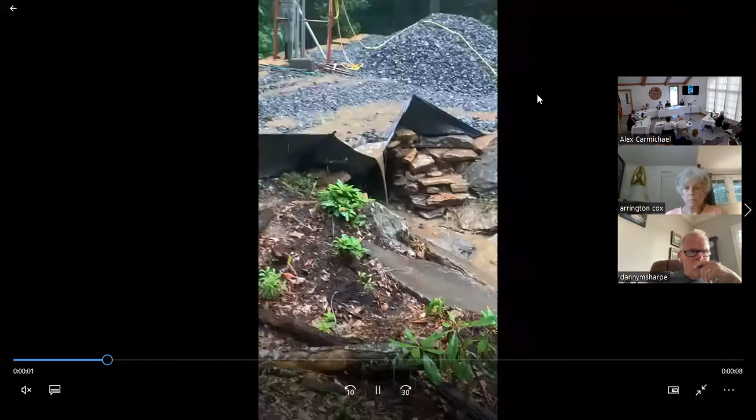I'd like to start off by asking that these videos, which probably total 30 seconds, be shown on the screen, so everybody will know what I'm talking about. Josh, can you open the folder Jim Hamilton exhibits under the 8/4 date. And yes, so that should be, yeah. That's the wrong video, Mr. Chairman. That's the wrong video. That's the right one.

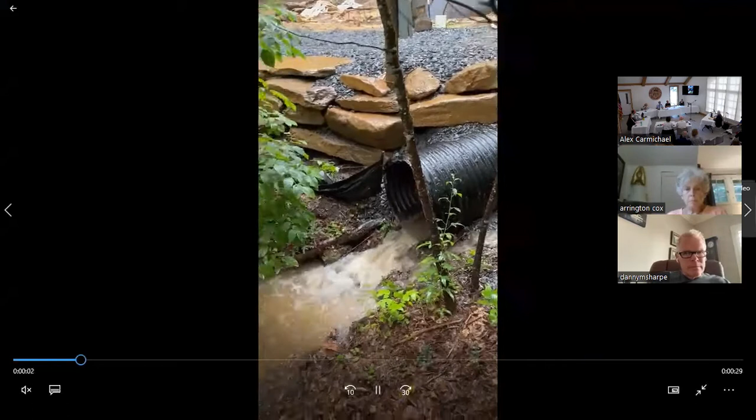This is a video showing water coming out of the culvert under the stream bed in my property and then rushing down the stream bed. And this is a video showing the water coming down after it's left my property onto a right of way and then through the culvert under Graybeard Trail and flowing into Flat Creek.

The first video showed water coming out of the culvert from Mr. Burns' property into the stream bed on my property, and then flowing down that stream bed for maybe 20 or 30 feet. The stream continues on my property for 100 feet, but we showed about 20 feet of the stormwater flowing down the stream bed. The second video shows the water in the stream in the MRA right of way, right after it leaves my property, coming down the stream bed there, going under the culvert on Graybeard Trail, and then going into Flat Creek. Everybody clear about that?

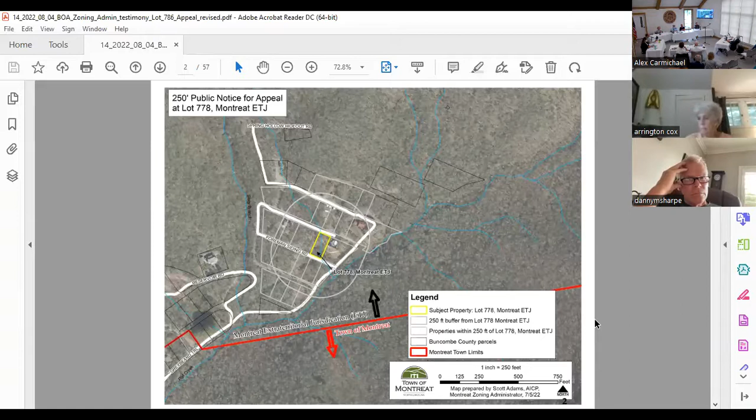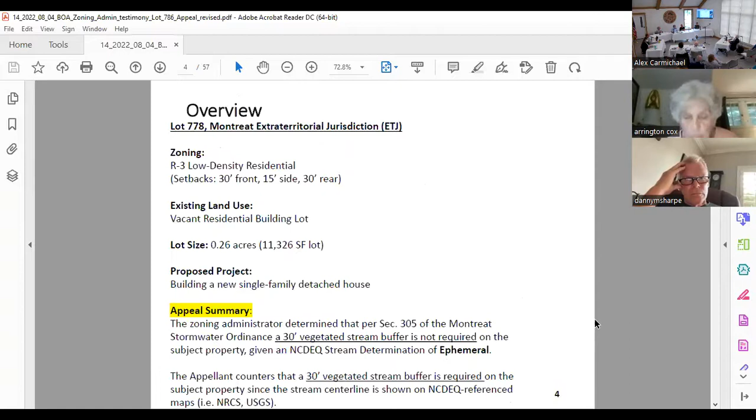So if you could go to the next slide. So again, just a brief reminder of the subject property that we're talking about. It's there in the center in yellow. This was the public notice that was sent out to properties within 250 feet of the site. You could go to the next slide. This is a survey level view of the subject property in the dashed line there. The blow up on the upper part of the slide is just a notation on the latitude and longitude that was listed in the stream determination letter of what I'll characterize as the boundary between intermittent stream north of that, above that, and ephemeral stream below that and south of that. Next slide, please. Would you put that slide back up? I'm not sure I can. Certainly.

Scott, explain to me again what the blow up is. So there in the top center of the screen where it says flag at subsurface, that is simply a blow up of the area highlighted in yellow on that parcel. That's a specific point of latitude and longitude that was cited in the June 28th stream determination letter from Andrew Moore with NCDEQ, delineating the point of departure between intermittent stream above that and ephemeral stream below that.

And up at the top in the corner, what does that say? So that is a call out of at least the surveyor's note of drainage ditch. But that is the surveyor's note on the survey. Maybe the surveyor's note, but that is not a drainage ditch. That is 100 feet of stream that is on my property. It's a stream that flows every time it rains hard. Right, an ephemeral stream.

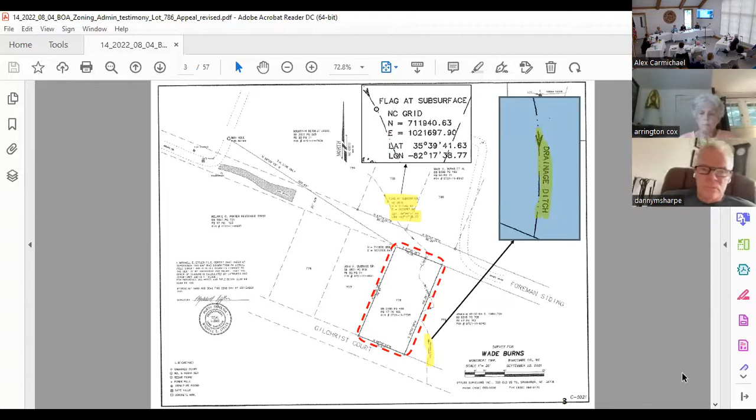Next slide, please. So again, just on the bottom there, the appeal summary, that was my attempt to fairly succinctly summarize what the appeal is. I've made the determination that the stream buffer is not required per the stream determination of ephemeral and the methodology that was used to do that. The appellant, Mr. Hamilton, is countering that a 30-foot vegetated stream buffer is required. At least my summation of this is on hearing that it is shown on a map.

I will make a note that the maps are a first level of review. The whole point of the stream determination is for an individual property owner to be able to say, yes, I know it's shown on a map. If I didn't want to question it any further, I would apply the buffer, because the assumption is if it's on the map, it is assumed to be perennial or intermittent, and the buffer is applicable. With a stream determination, that's a secondary, more specific level of analysis from NCDEQ that can determine one of those three stream types. So if it's determined as ephemeral, every communication that I've had from DEQ as a matter of law states that that is not required.

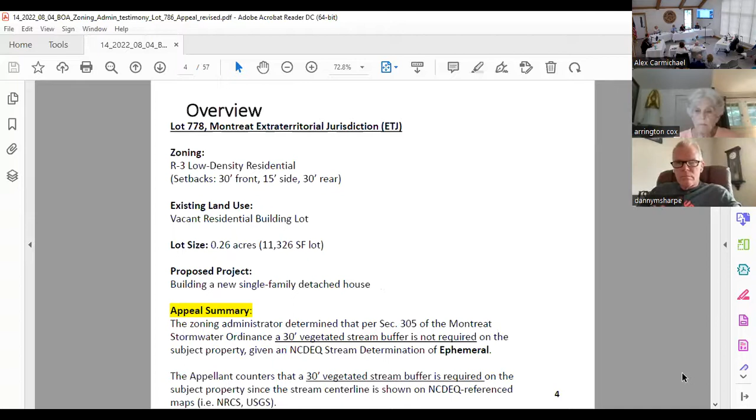If I could go just a few more slides. Mr. Chairman, may I ask Scott a question? Let's let people finish. All right, that would be fine. We'll be here till 10:30 or 11. I'm happy to wait. Okay, so I promise to try and walk through this as quickly as I can.

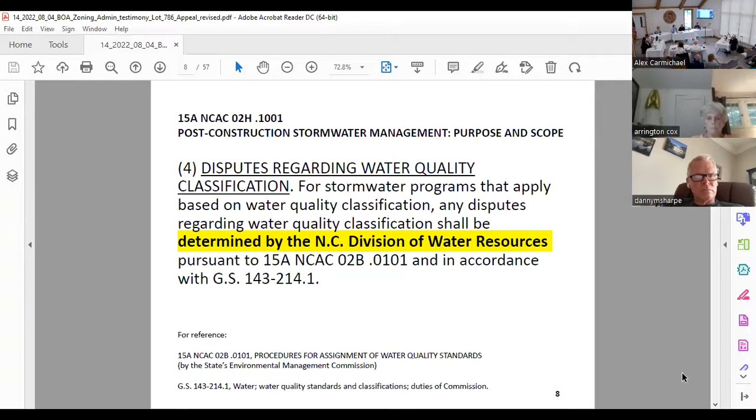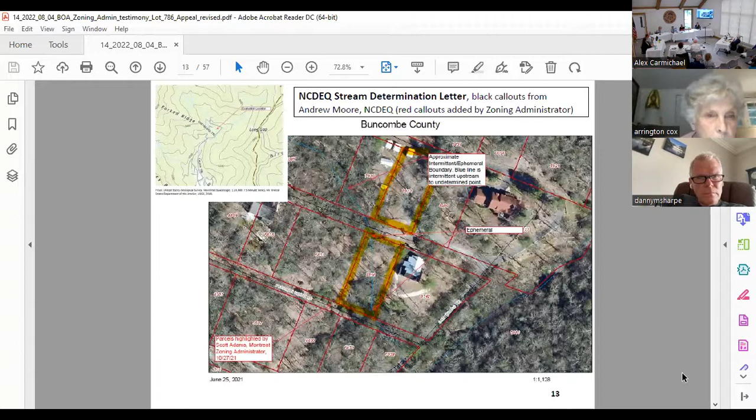If I could go to the next slide, please. So again, this is the stream determination letter regarding the subject property. Next slide, please. Again, with a site overview, that notation in the center of the screen, that's the same notation on that survey marker that I had up front, just noting the lat long.

Next slide, please. So changing focus for just one moment, I just want to give you all another quick example of the exact same methodology being applied to another property here in town where the question came up, hey, I'm on a stream. What is the stream? So this illustrative here was something I created to send to DEQ inquiring about the subject stream segment. And this is here in town at 304 North Carolina Terrace.

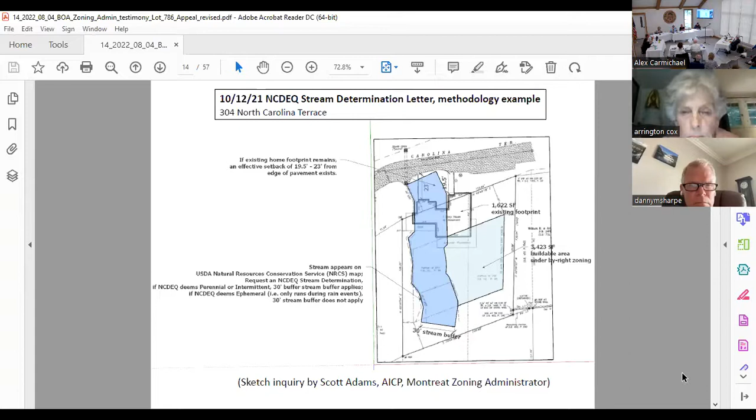Next slide, please. This is the stream determination letter. It came back as ephemeral. Next slide, please. This was in a following email from Andrew Moore with DEQ. The feature was determined to be ephemeral, which means it is not considered a stream. That was his direct statement in relation to that same application of the methodology.

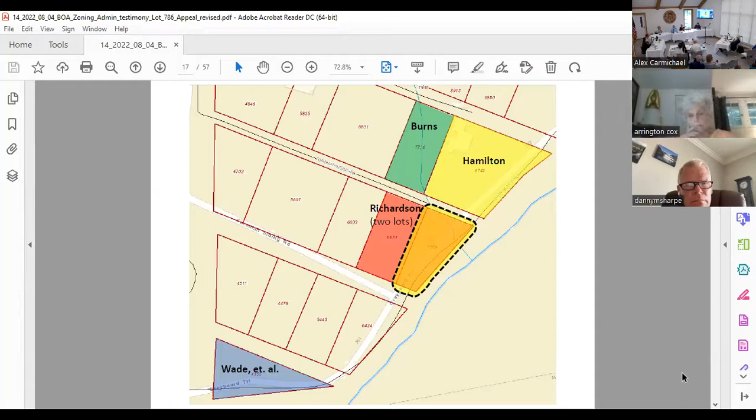If I could just get a couple more slides just to briefly respond to a couple of questions that came up in the last hearing. So you'll remember I prepared this sort of color-coded map last time to illustrate various property owners in immediate proximity to this. The one that's highlighted there in orange with the dashed line around it is owned by John Richardson, who supplied a stream determination letter that he received on that property in 2015. On the next slide, which determined that the segment along his property was ephemeral as well.

So the question about what is the stream doing outside of the subject property and immediately adjacent to that, there was a stream determination made for that segment on the property that it was ephemeral as well. There was a secondary note in there that water basically appeared at Graybeard Trail as a perennial spring of sorts. So I'm just making that differentiation to note that at least for the majority of the segment on the property south of there, it's been determined as ephemeral as well. If you could go to the next slide. This is just a quick illustrative of the subject parcel that was mentioned in that determination letter.

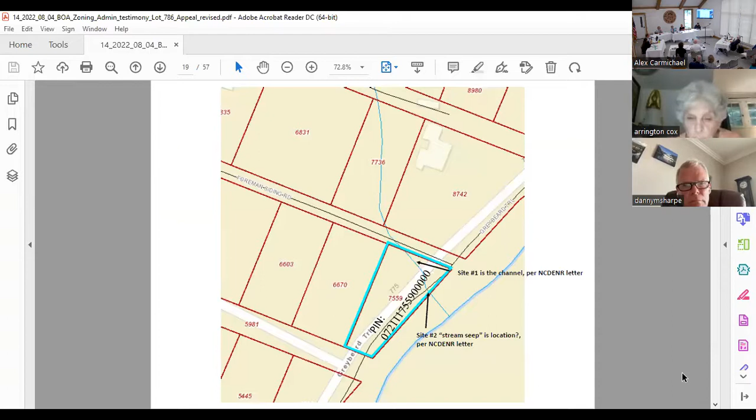If we could go to one more slide. So this was, again, a follow-on email from Stan Aiken with the NCDEQ Asheville office reiterating the applicability of the 30-foot buffer to perennial and intermittent streams, not to ephemeral. If we could go to the next slide, please. So this is what he referenced in his email. This is the specific stormwater law for areas that are subject to an MS4 permit, that being municipal separate storm sewer. That's Montreat's stormwater program.

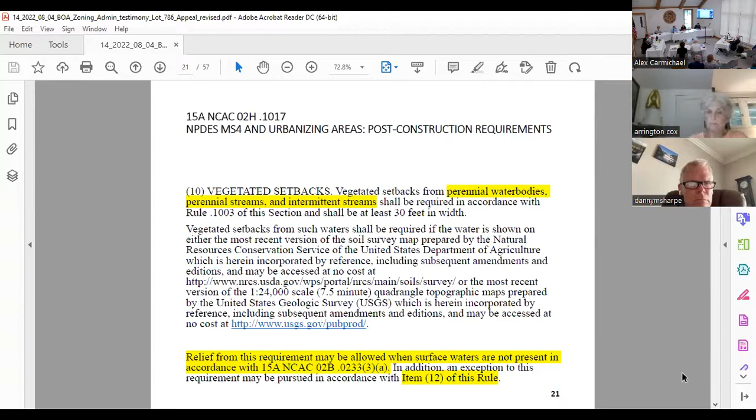So the specific mention of vegetated setbacks, again, perennial or intermittent, relief from this requirement may be allowed when surface waters are not present. So going to the next slide, I believe there had also been a question from a board member on the specifics of the section of 15A NCAC, which is, I guess, the origin of what's in the town's ordinance. So I just highlight it here. Interestingly enough, it is classified as the Neuse River Basin Protection Rules. I can't necessarily speak to how DEQ draws its references, but that is the reference that is in the town's ordinance.

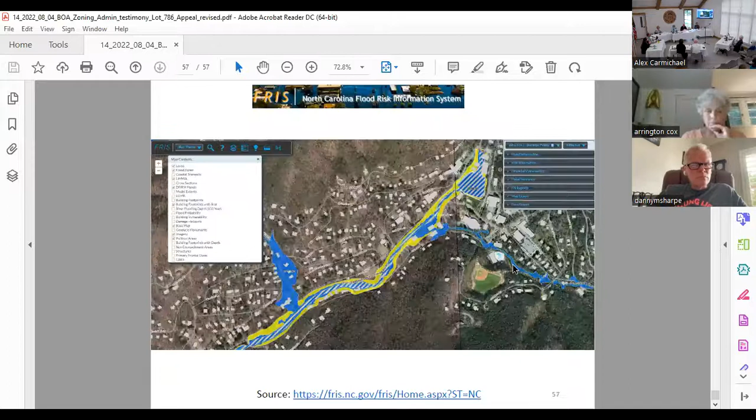So if I could bring back my presentation just to speak to one slide, I promise just one slide. If we could go pretty much to the bottom, and then we'll work our way back up. So if you go clear to the bottom. Yep. Okay, let's go up one more. One more. Sorry, one more. There we go. Thank you. So I just wanted to bring this slide up.

I just want to clarify any possible confusion over stormwater impacts that we've seen in the videos, and I think those videos through various stages at least show that some erosion and sediment control measures could be corrected and addressed by the subject property owner. That is in construction, stormwater questions and erosion and sediment control.